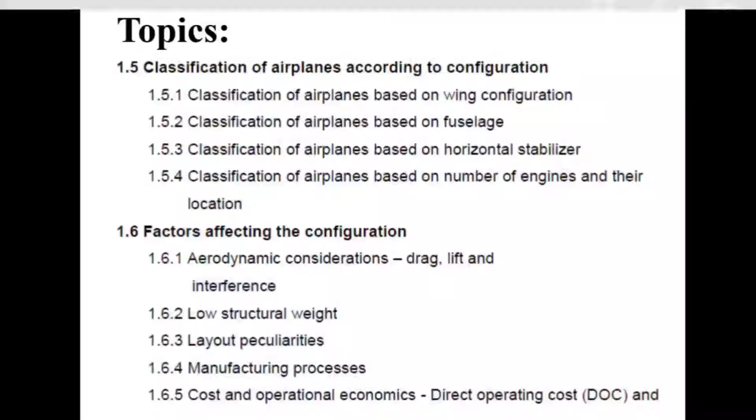So first of all, I am going to again introduce the topics or syllabus left that we are going to discuss in today's lecture. So see here, the first topic is related to classification of airplanes according to the configuration. In this case, you can see the classification of airplane based on wing configuration, based on fuselage, based on horizontal stabilizer, and based on number of engines and their location. With the help of that, we classify an airplane according to the configuration.

And the second topic is factors affecting the configuration, that is aerodynamic consideration, in that case lift, drag and interference effect. Understand? Then low structural weight, layout peculiarity, manufacturing processes, and cost and operational economics. So these topics we are going to discuss in today's lecture, and this is lecture number 2 of chapter number 1, that is Introduction of Aircraft Design.

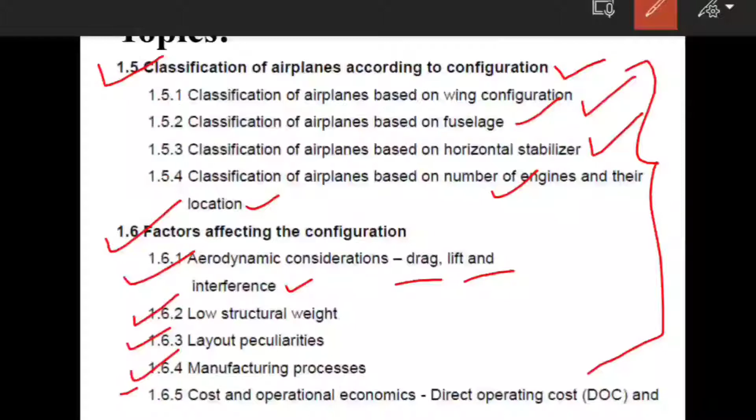So guys, let's start with the first point, that is classification of airplane according to the configuration. But before that guys, again I am going to clear, aircraft design at the starting of the chapter is purely theoretical, and after you can find the numericals in chapter number 2, chapter number 3. So don't be bored, the first chapter is fully theoretical.

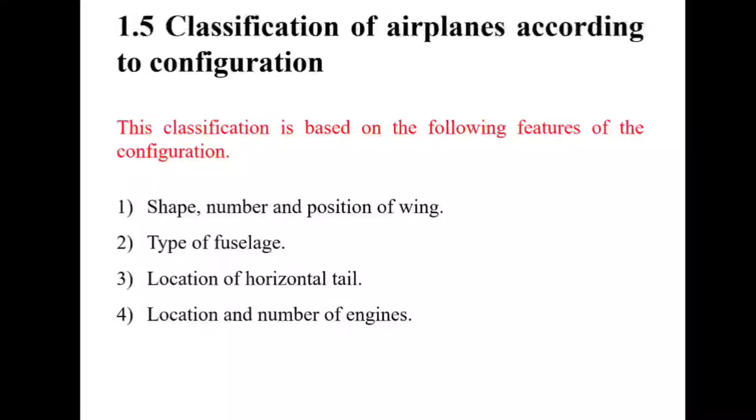So let's see, the first one is classification of airplane according to the configuration. Here you can find that this classification is based on the following features of the configuration. The first one is shape, number and position of the wing. So guys, this is very important, and we already discussed it in my short video related to classification of airplane. Then the second point is related to types of the fuselage. That is also a deciding factor to classify the airplane.

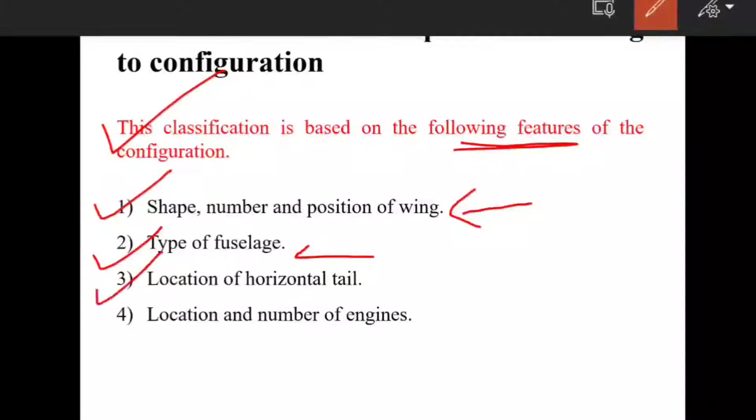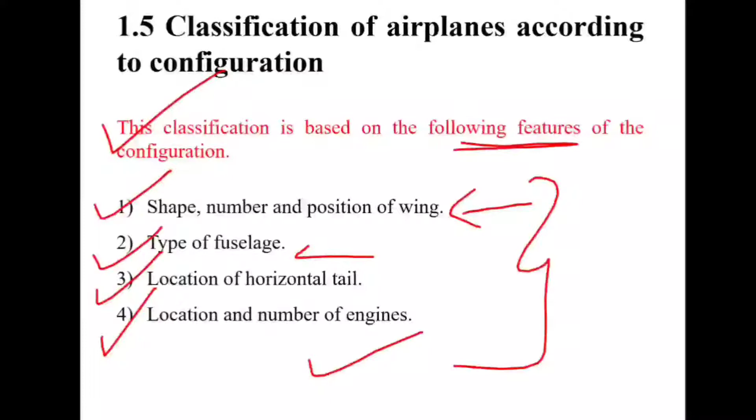Then the third one is location of horizontal tail, and the fourth one is location and number of engines. So that is also important. These 4 points are very important to classify the airplane according to the configuration. Then we are going to see the first one, classification of airplane based on the wing configuration. Wing configuration means shape, number and position of the wing. So that we are going to see first.

We know earlier airplanes had 2 or more wings, that is the Wright brothers' airplane. If you search in Google, you can find the wings are braced with wires, and presently only a single wing is used, and these airplanes are called monoplanes. Understand? When the wing is supported by a strut, the airplane is called a semi-cantilever monoplane. If you see figure A, you can understand this semi-cantilever monoplane. The wing is supported by the strut, if you see clearly here.

But depending on the location of the wing on the fuselage, the airplane is called high wing, mid wing and low wing configuration. You can see pictures B, C and D: cantilever high wing monoplane, cantilever mid wing monoplane, and cantilever low wing monoplane. So this is a category of airplane depending upon the location of the wing on the fuselage. The airplane is called high wing, mid wing and low wing configuration.

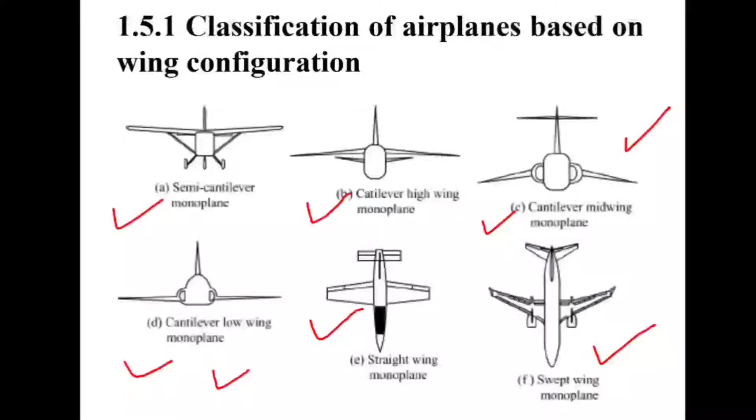And further you can find different configurations, like if the wing has no sweep, the configuration is called straight wing monoplane. You can see this picture is a straight wing monoplane. There is no sweep in that configuration, that's the reason it is called straight wing monoplane. And the swept wing and delta wing configurations you can find here, the swept wing monoplane. So this is about classification of airplane based on the wing configuration. I hope you guys understand with the help of this picture and whatever I explained.

So let's see the second point, that is classification of airplane based on the fuselage.

So let's see how it is based on the fuselage. Based on the fuselage, if you see the picture I have mentioned, generally airplanes have a single fuselage with wing and tail surfaces mounted on the fuselage. If you see picture number H, that is a conventional single fuselage. The airplane has a single fuselage with wing and tail surfaces mounted on the fuselage.

In some cases, the fuselage is in the form of a pod. In such a case, the horizontal tail is placed between the two booms. If you see figure number I, pod and boom configuration, the horizontal tail is placed between the two booms emanating from the wing. This airplane generally has two vertical tails located on the booms, and the booms provide the required tail arm for the tail surfaces.

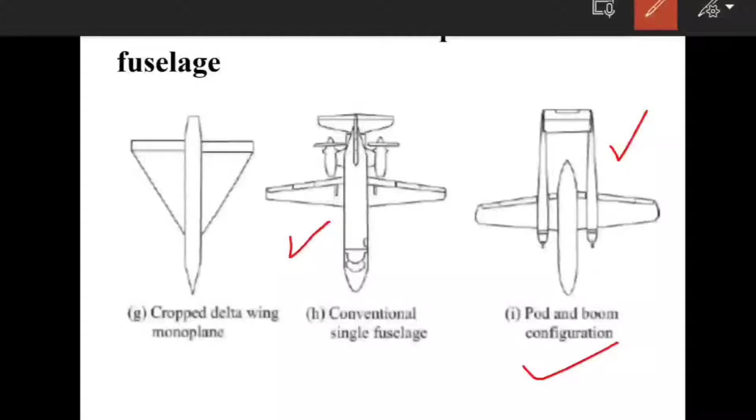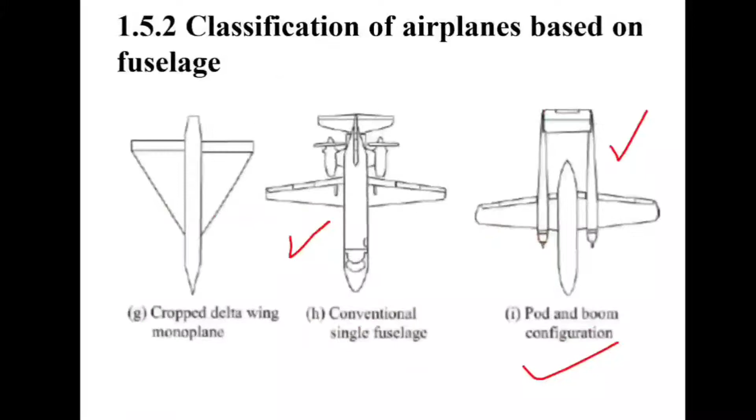Some airplanes with twin fuselages have been designed in the past. However, this configuration is not currently favored. So this is about the classification of the airplane based on the fuselage. I hope you understand.

In this tailless design, the functions of the elevator and ailerons are performed by the elevons located near the wing tip. When both elevons on the left and right wings move in the same direction, they function as the elevator. When the two elevons move in opposite directions, they function as ailerons.

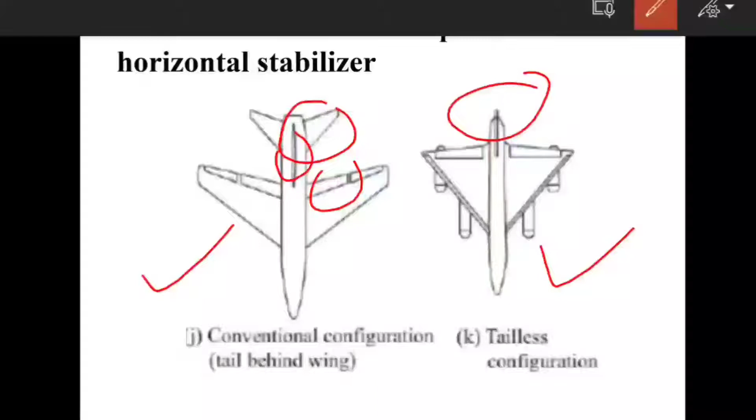In some airplanes, control in pitch is obtained by a surface located ahead of the wing, and this configuration is called canard configuration. I have not shown that picture, but you can find it easily if you search on Google. So this is about the classification of airplane based on the horizontal stabilizer.

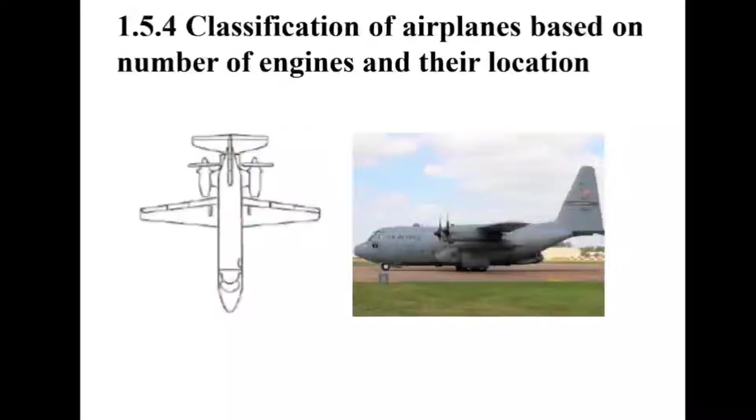Let's see the next one, classification of airplane based on the number of engines and their location. Airplanes with 1, 2, 3 or 4 engines have been designed, and in rare cases higher numbers of engines. An engine located in the fuselage could be in the nose or in the rear portion of the fuselage. When located outside the fuselage, the engines are enclosed in nacelles, which could be located on the wings or on the rear fuselage.

In some airplanes with the engine propeller combination, if you see this figure, there are two configurations, tractor propellers and pusher propellers. In pusher configuration the propeller is behind the engine, and in tractor configuration the propeller is ahead of the engine.

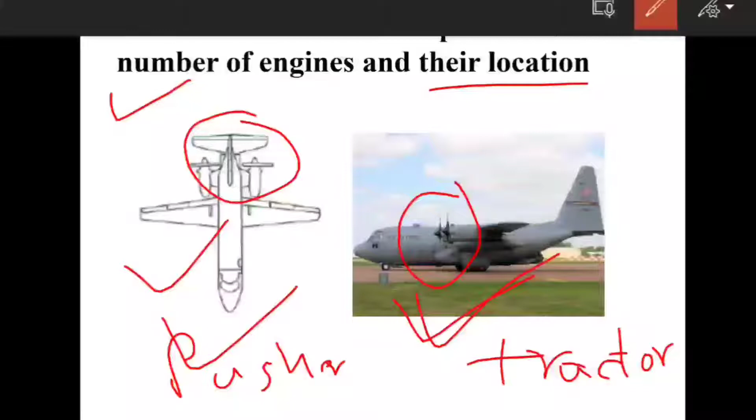This is a tractor configuration: the propeller is mounted ahead of the engine, but in the pusher configuration the propeller is behind the engine. This is a pusher configuration, and this one is the tractor configuration. So this is about the classification of airplane based on the number of engines and their location. It is very simple to understand.

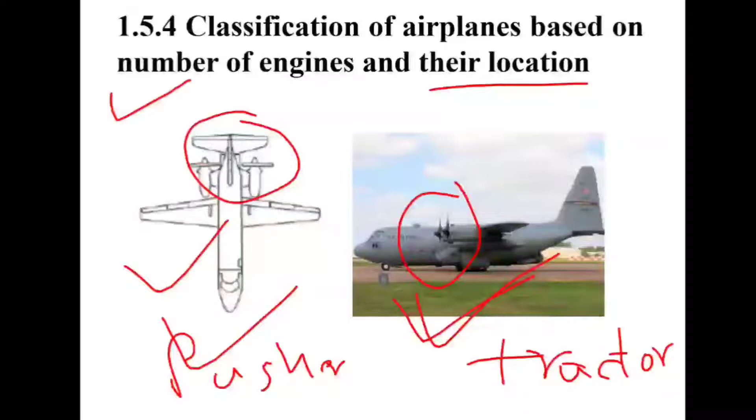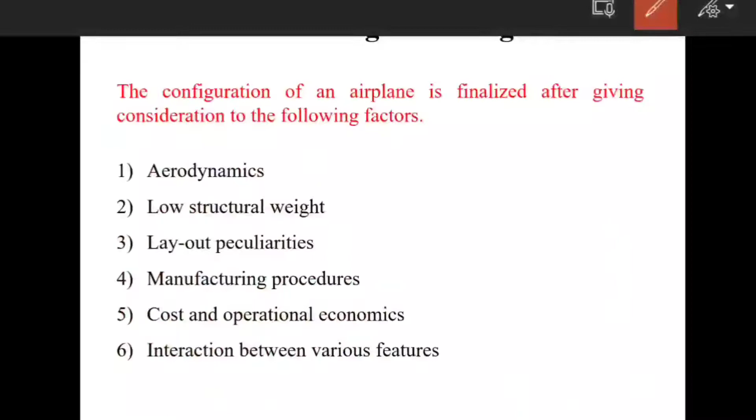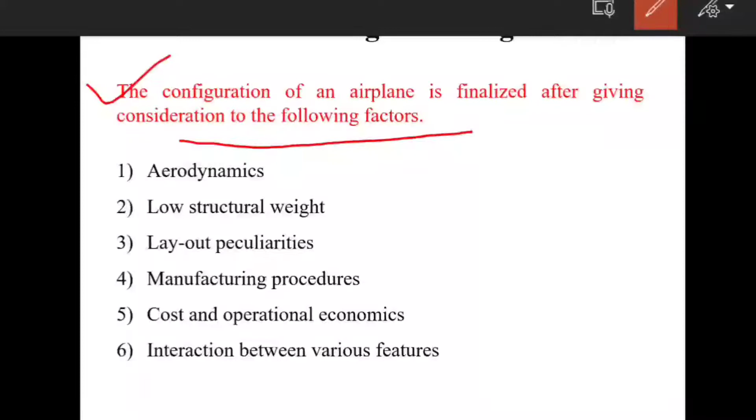Let's see the next point, 1.6, factors affecting the configuration. The configuration of the airplane is finalized after giving consideration to several factors. The first factor is aerodynamics, second is low structural weight, third is layout peculiarity, fourth is manufacturing procedures, fifth is cost and operational economics, and sixth is interaction between the various features.

So these are the factors affecting the configuration of the airplane. Aerodynamics affects the configuration, maybe the configuration of the wing, the fuselage, or the number of engines.

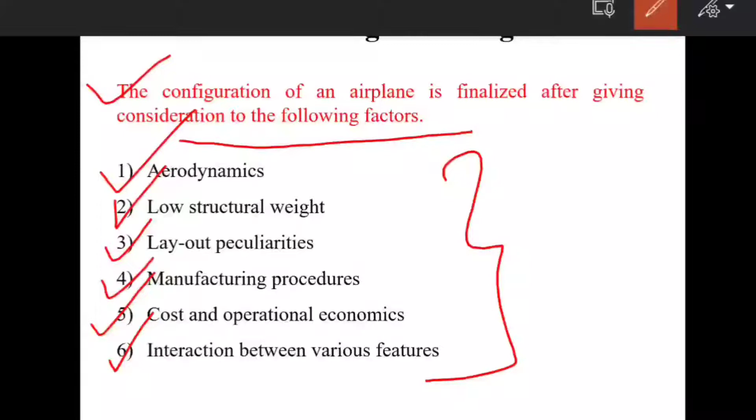So aerodynamics, structural weight, layout peculiarity, maybe it's a complex layout. Then manufacturing processes, cost and operational economics. So this is very important to understand, to find out what's the factor. So these are the factors affecting the configuration.

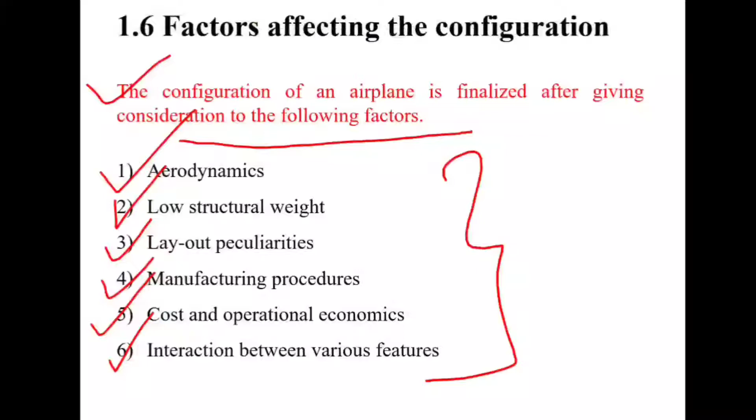Now we are going to see the next one, that is aerodynamic consideration. So guys, aerodynamic consideration: drag, lift and interference effect. So how does it affect? Let's see, the aerodynamic consideration in the design process involves the following parameters: drag parameters, lift parameters and interference effects. We are going to discuss one by one how the aerodynamic consideration in the design process is affecting.

So the first one is drag. If you see, the drag of the entire configuration must be as small as possible, and this requires a thin wing, slender fuselage, smooth surface condition, proper value of aspect ratio and sweep value. So if these types of parameters are maintained, drag is very low. Again I am repeating, the drag is required to be minimum possible, with the thin wing, slender fuselage, smooth surface condition and proper value of aspect ratio and wing sweep.

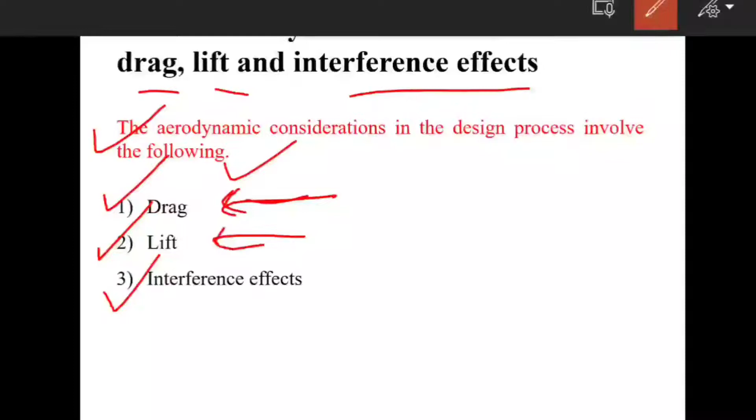If you see about the lift, the airplane must be capable of developing sufficient lift under the various flight conditions including maneuver. In that case, the maximum lift coefficient also decides the landing speed. And this consideration requires proper choice of airfoil, means to prevent flow separation, and high lift devices also. So high lift devices also play a very important role related to the lift consideration of aerodynamic parameters. So I hope you understand about the lift.

Again I am repeating, the airplane must be able to develop sufficient lift under the various conditions, including maneuverability. So the maximum lift coefficient also decides the landing speed. And this consideration requires proper choice of airfoil, what we are using in the wing, and means to prevent the flow separation. Otherwise flow separation is high, so lift is low. And high lift devices are required to achieve proper operation during landing and takeoff performance. So this is about the lift.

And the third one is interference effect. In aerodynamics, the flow past various components like wing, fuselage and tail is usually studied individually. However, in the airplane, these components are in proximity of each other, and the flow past one component affects the flow past other components. These changes in the aerodynamic forces and moments due to the proximity are called interference effect.

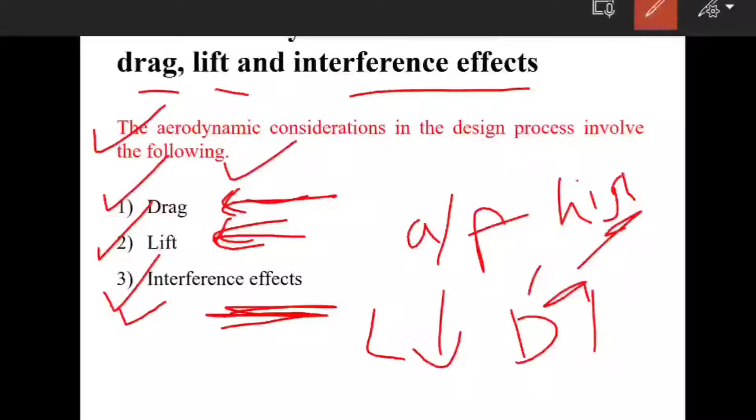And the layout of the airplane should be such that the increase in drag and decrease in lift due to the interference effect are minimized. That's the reason we are minimizing the interference effect. If the interference effect is high, lift is low and it increases the drag value. And this can be achieved in the subsonic airplane by proper fillets at the joints: wing and fuselage, tail and fuselage, and wing and engine pods. So I hope you understand the aerodynamic consideration; I have explained each parameter, lift, drag and interference effect, in detail. Let's see the next one.

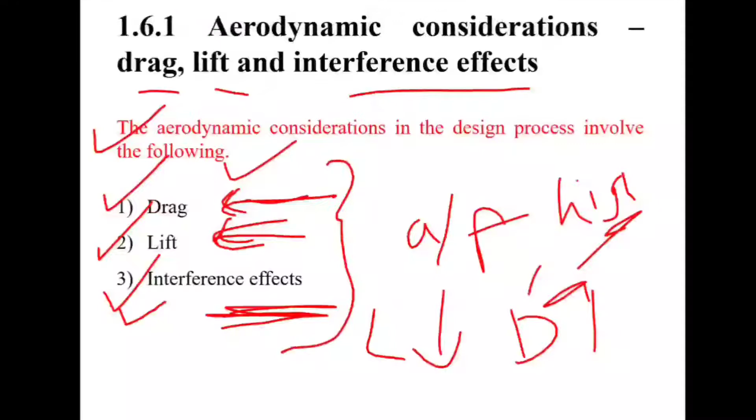Low structural weight. So guys, what is low structural weight? The weight of the airplane must be as low as possible. With low weight, the thrust required to produce the required lift is also less, so the fuel consumption is less. So let's see what is required. High strength to weight ratio material is required. The second requirement is an airfoil with high thickness ratio. The third requirement is a wing with a low aspect ratio, and the fourth one is relieving load, that is, wing-mounted engine location, etc.

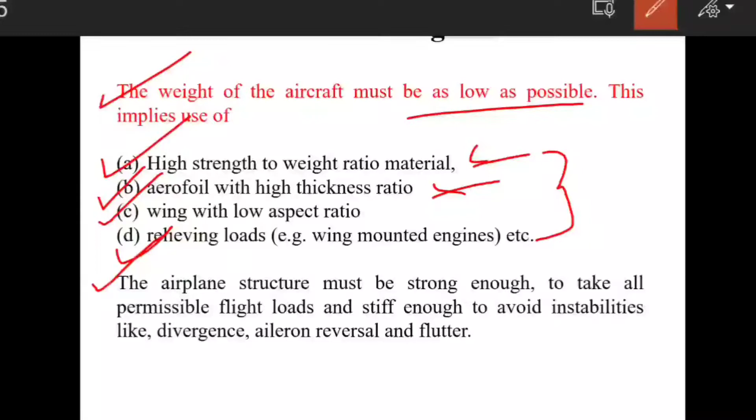So these factors are used in order to minimize the weight of the airplane as much as possible. Then the airplane structure must be strong enough to take all the permissible flight loads and stiff enough to avoid instabilities like divergence, aileron reversal or flutter. So we are choosing these parameters, but also considering that the structure of the airplane must be strong enough. So this is about low structural weight and how we maintain it, with all four points mentioned here.

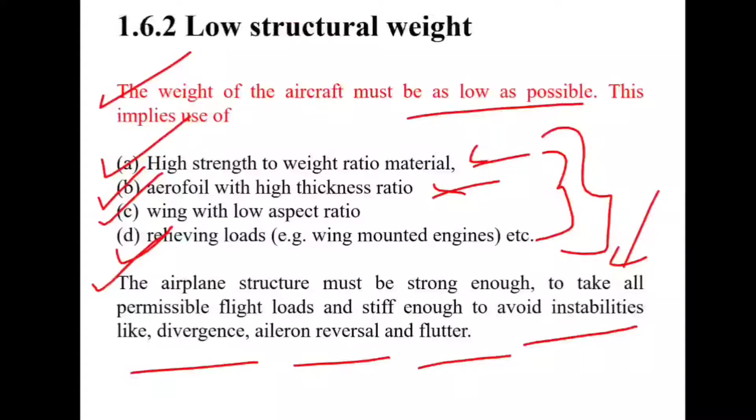So let's see the next one, layout peculiarities, guys. Let's see what that is, because the name is very unique.

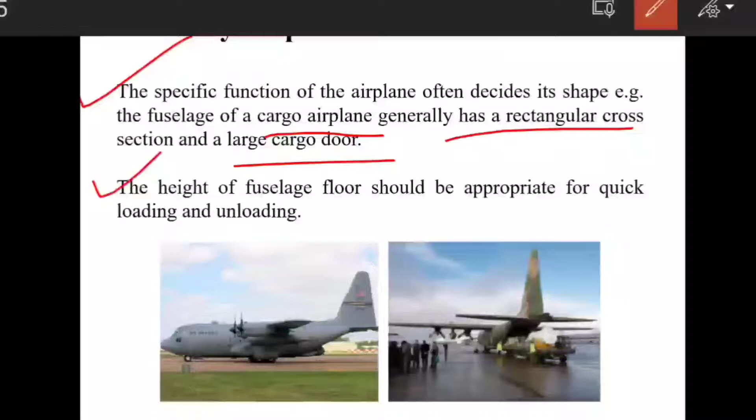So in this case, the airplane is often designed in a shape suited to its specific function. For example, the fuselage of a cargo airplane generally has a rectangular cross section and a large cargo door, and the height of the fuselage floor should be appropriate for quick loading and unloading. That is related to layout peculiarity. That is a complex layout. Understand? So that is required in order to get smooth and proper functioning of the aircraft. So this is about the layout peculiarity.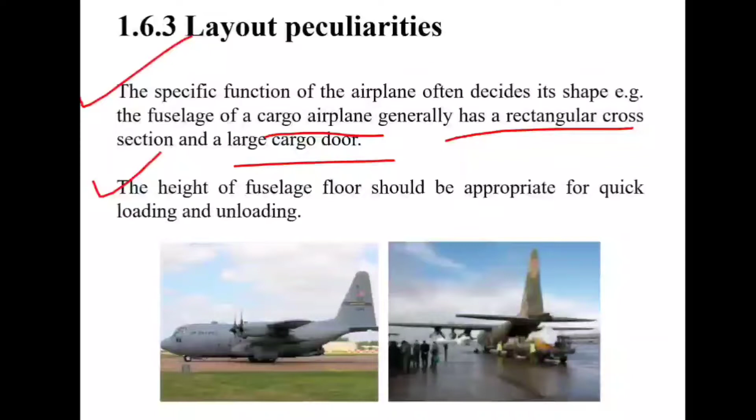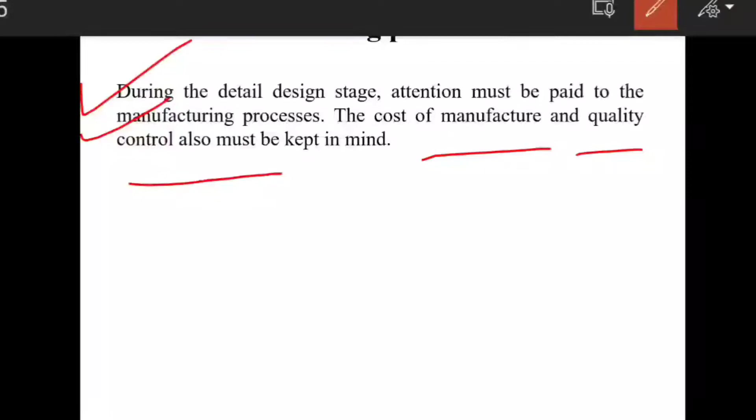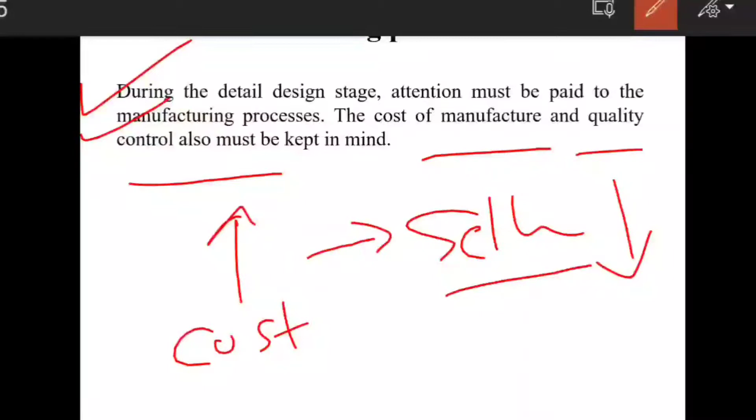Let's see about the manufacturing process. So guys, in the manufacturing process, very important: during the detailed design, attention must be paid to the manufacturing process, because the cost of manufacturing and quality control are also very important, and we always keep them in mind. Otherwise, if the manufacturing cost is high, our chances of selling the aircraft are very low. So we design the aircraft accordingly. The manufacturing cost should always be as low as possible in order to get more profit. So this is about the manufacturing process.

Let's see about the cost and operational economics. In this case, in cost and operational economics, a very important point is DOC and IOC. So what is DOC and IOC? We are going to discuss it here, and I mentioned very important, detailed, defined content here, so that's the reason it's a little bit lengthy. First of all, understand DOC means direct operating cost and IOC means indirect operating cost. So let's see what I have mentioned here.

The total operating cost of an airplane is the sum of the direct operating cost, that is DOC, and IOC. Understand? That is the definition of total operating cost. That's the reason DOC and IOC are important to understand the total operating cost. So let's see what DOC is and which parameters it is related to. DOC is related to the cost of the hourly operation of the airplane, like the cost of fuel, lubricant, maintenance, overhaul, and replacement of parts for the airframe and engine.

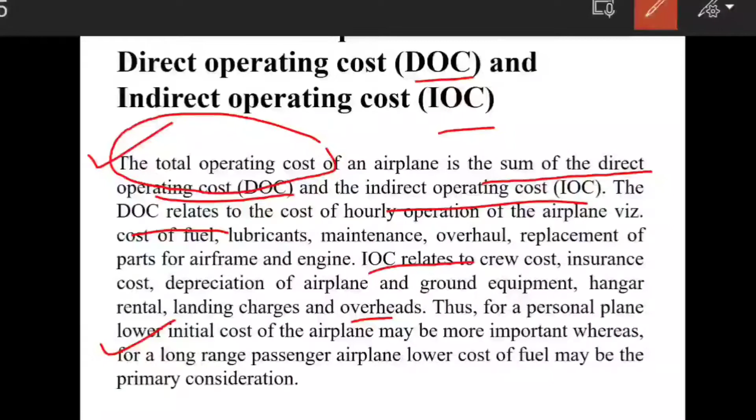But IOC, the indirect operating cost, is related to the crew cost, insurance cost, depreciation of the airplane, ground equipment, hangar rental, landing charges and overhead. So that's why it is the indirect operating cost. I hope you guys understand DOC and IOC. Thus for a personal plane, the lower initial cost of the airplane may be more important, whereas for a long-range passenger airplane, lower fuel cost may be the primary consideration. So in this way we calculate the total operating cost of an airplane with the help of DOC and IOC.

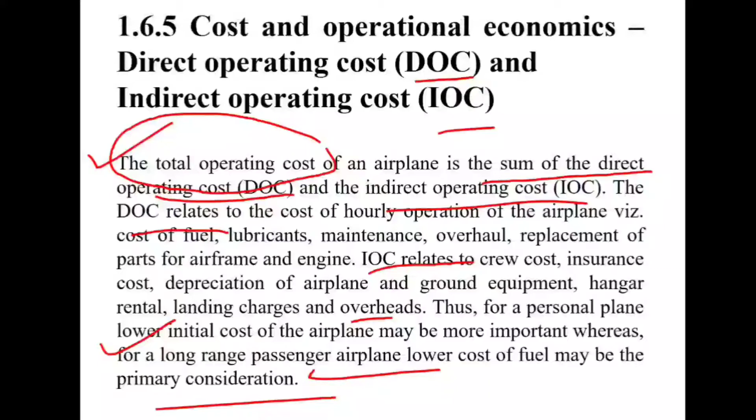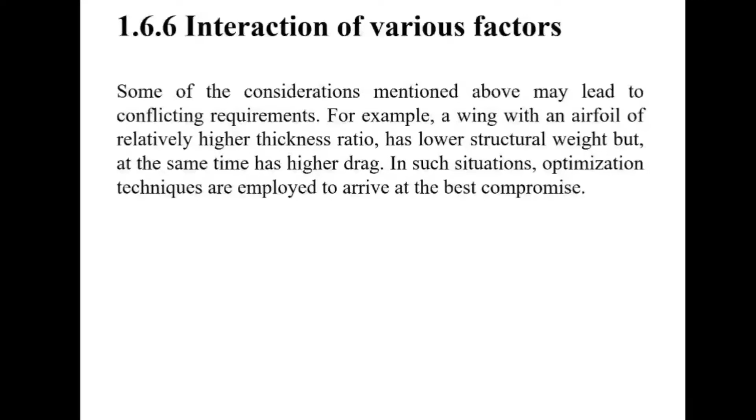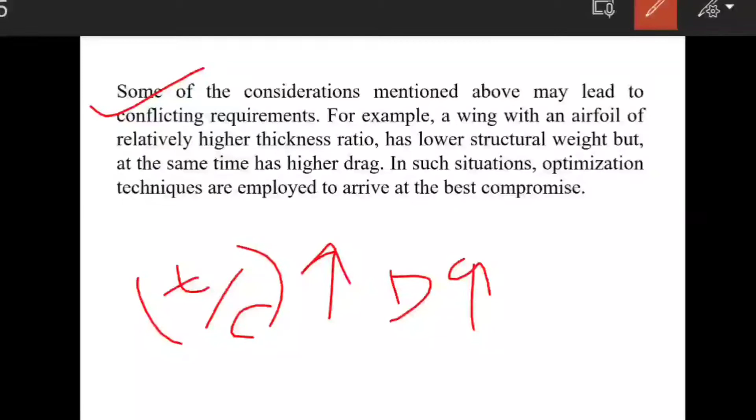Let's see the last point, that is related to the interaction of various factors. Some of the considerations mentioned above may lead to conflicting requirements. For example, a wing with an airfoil of relatively higher thickness ratio. If the thickness ratio is higher, it always creates some problem, because in that case drag is very high. That is a different interaction of the parameters. Understand?

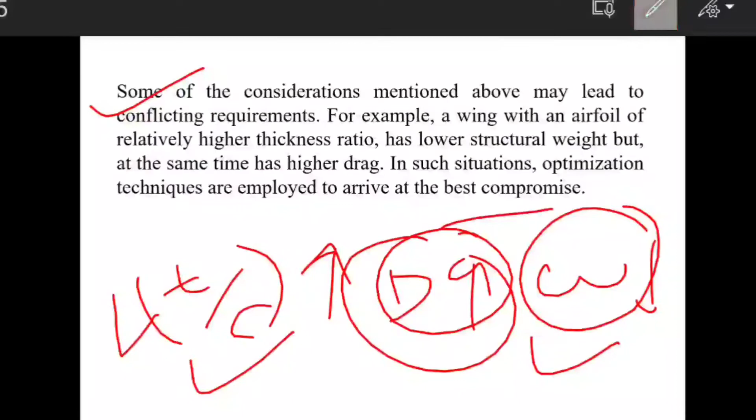It has lower structural weight, but at the same time drag is high because of the high thickness ratio. So it is meaningless to maintain a high thickness ratio just for low structural weight. We want to balance both thickness ratio and structural weight at the same time, otherwise drag is high. In such a situation, an optimization technique is required to be employed for better compromises and better results. So guys, this is about the interaction of various factors.

So guys, thank you for watching my video. I hope you guys understand each and every topic of chapter number 1, that is introduction to aircraft design. I made all my PPTs accordingly, so students can easily understand each and every point, because the theory portion is a little bit high in the aircraft design subject.